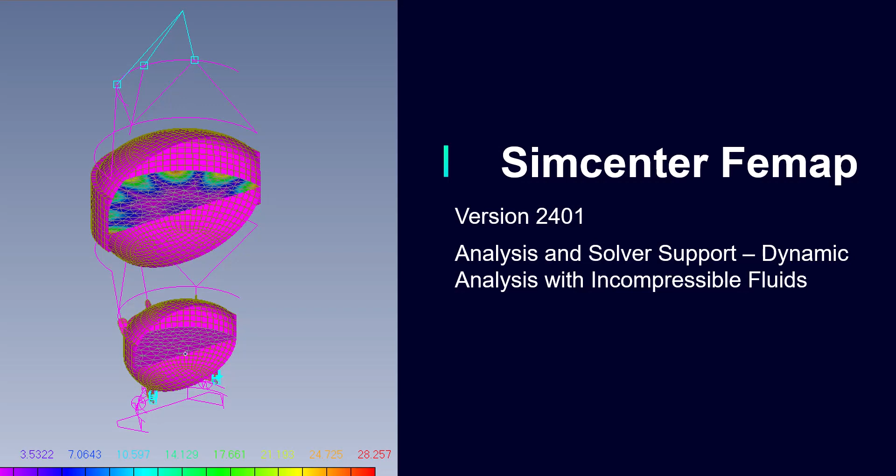Simcenter Femap 2401 includes extended support for dynamic analysis of incompressible fluids. While previous versions of Femap included support for modeling the incompressible fluid implicitly as a virtual fluid mass, Femap 2401 allows users to model the incompressible fluid explicitly as a defined fluid mass with solid elements.

The defined fluid mass allows users to model complicated fluid volume shapes and extended fluid volume types, such as volumes with sloshing free surfaces. We can use these capabilities to compute the effective elastic modes of the structure when the fluid is able to slosh. This video will demonstrate that capability.

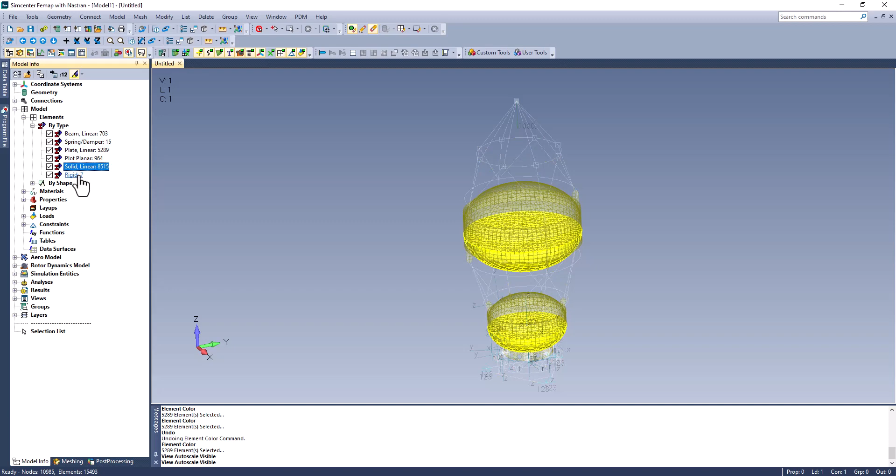In this model, which represents a satellite structure, I've used plate elements to model the structure and solids to represent the fluid elements. The nodes defined in the meshes are separate. I've also defined a fluid region which specifies the details of the incompressible fluid surface. This model has two fluid regions, an upper region and a lower region.

If I right-click on the fluid region and select Edit, I can change the settings I have selected for the surface before analyzing the model. In this model, the fluid volume has a free surface, and the free surface is set to Allow sloshing.

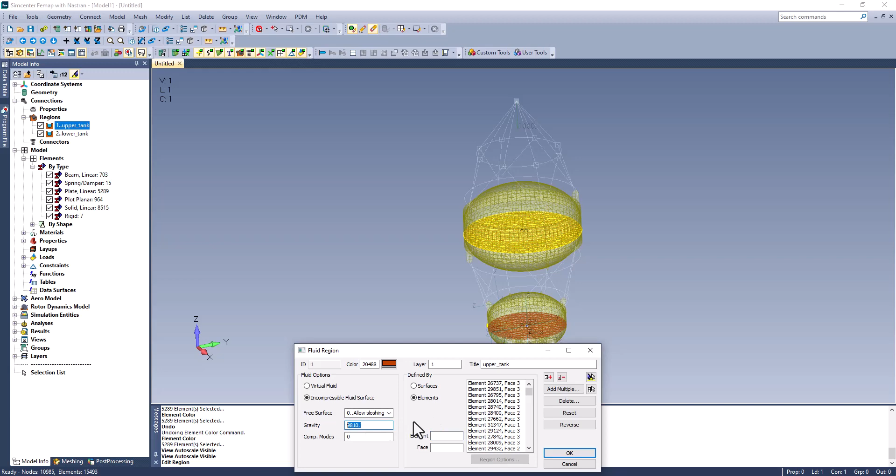I've also selected the fluid element faces that comprise the free surface and have defined my acceleration due to gravity. I do not need to specify the wetted surfaces of my structure since the solver, Simcenter, will do that automatically.

Now I will edit my analysis set, which I have already defined, by opening the Analysis Set Manager, expanding the Options tab for the correct analysis set, expanding the Incompressible Fluid Options tab, and double-clicking any of the settings. In this dialog, I can define my computational method, surface flatness tolerance, and various other options to configure the solution.

The number of slosh modes is usually equal to the number of nodes on the sloshing surface. To get the elastic modes, I need to compute the number of expected slosh modes and the number of elastic modes of interest.

If I just want to retain the lowest frequency modes and neglect the higher order slosh modes, I can use the slosh CMS parameter to perform component mode synthesis reduction on the degrees of freedom of the sloshing free surface. The number that I assign here is the number of degrees of freedom to retain for the sloshing free surface. In this case, I will select 20. I will click OK, and then I will click Analyze to analyze my model.

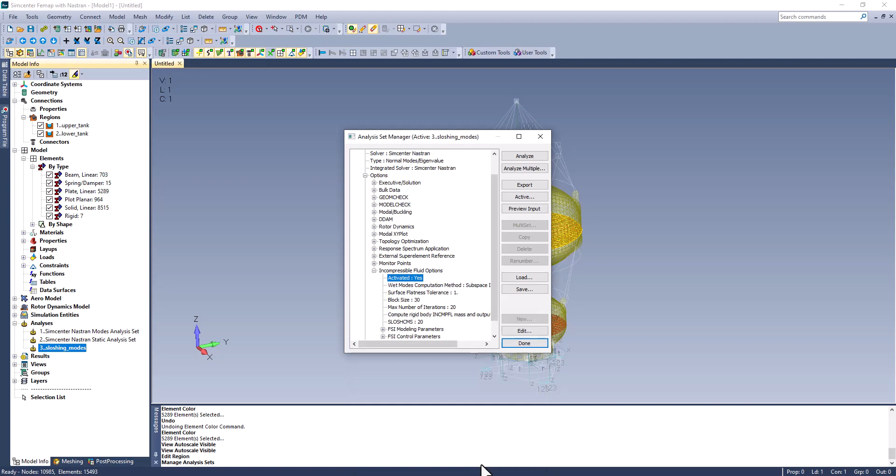After solving the model, we need to import the 2D plot-only mesh that covers the slosh surface in order to post-process the sloshing modes. In order to do this, I will use the command File, Import, Analysis Model. After clicking OK, navigate to and select the .dat file that was just created and double-click it to open it.

You may have several .dat files that were just created. If so, select the one that says plotel in the name. Once the correct analysis model has been imported, the plot planar elements can be seen in the model.

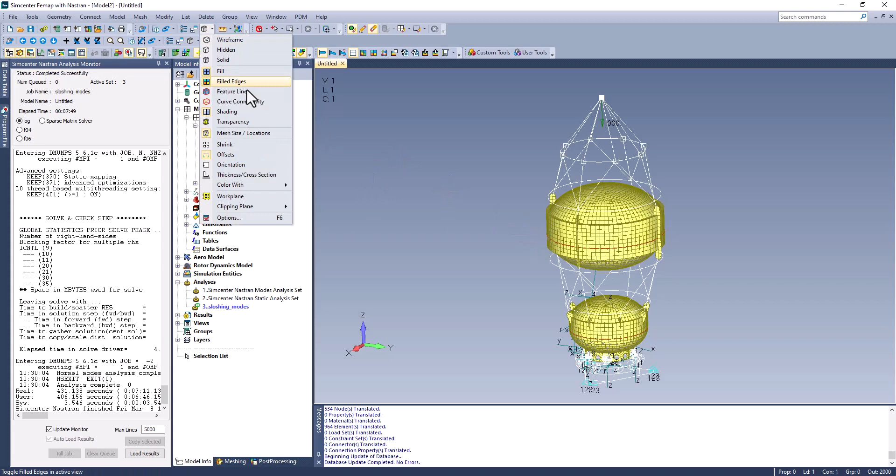In order to better visualize the results, I will turn on my clipping plane using the View Style icon on the View toolbar. I can simply click the Clipping On option to activate my clipping plane. I can use the same toolbar icon to edit my clipping plane if I want to change the view that the clipping plane gets on my model.

Once my clipping plane is set, I can view various sloshing modes by double-clicking on different output sets in the model info tree and clicking the Animate icon on the Post toolbar.

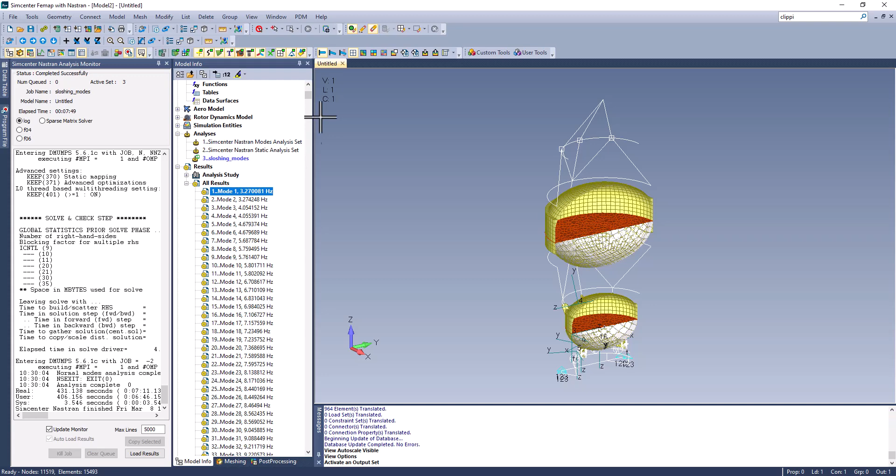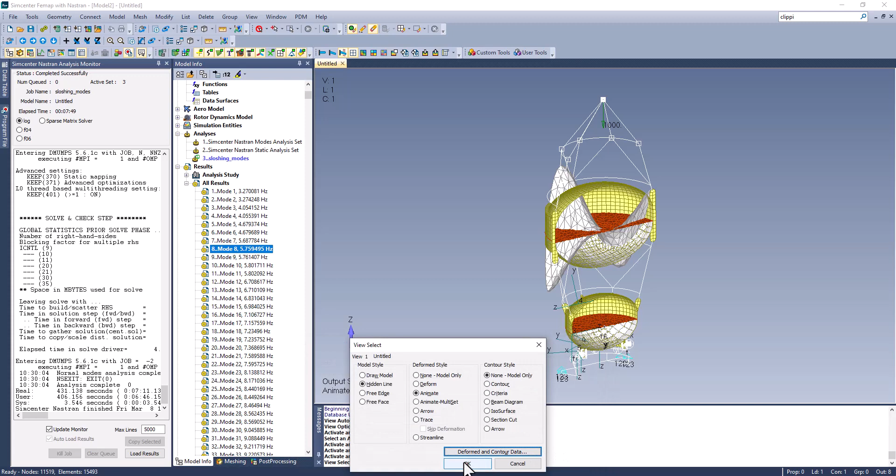To help me better visualize these displacements, I will turn on a contour plot of total translation. To do this, I will use the shortcut F5 to bring up the View Select dialog and click on Deformed and Contour Data. From there, I can set my contour output vectors to total translation, click OK, and then click Contour in the Contour Style section.

Thank you for watching this video on dynamic analysis of incompressible fluids in Simcenter Femap version 2401.